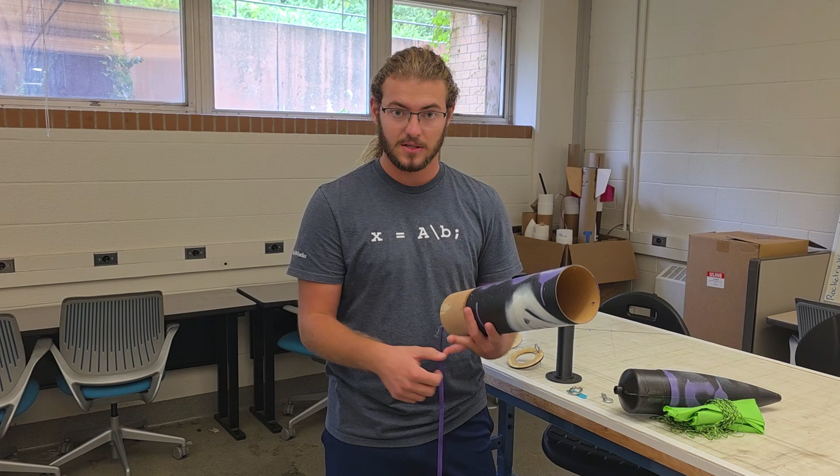So with a payload section that goes directly into here, a payload section will be where you can put anything, including electronics, plushies. I put an egg in there. Someone told me if an egg can survive flight, a human can. So food for thought. You can throw cameras in there to record your launch. That will be a payload section here. That leads directly to the coupler. Its job is to mate the two outside body tubes together, where itself will be connecting these two together.

On that, there is a bulkhead here, which is where the eye bolt is attached to, and that goes straight to the shock cord. For our tutorial, I'll show a quick link connecting an eye bolt to the shock cord. There's pros and cons to this. I like to do this where I can change out different components of my rocket. That leads directly to the eye bolt, which is this, which holds on to either a bulkhead like this, or a centering ring like this, where the quick link will just attach directly on, and then you'll screw it on to connect.

So after that, we have the shock cord, which itself is where the parachute gets attached onto, which I'll show later in this tutorial. But also, more importantly, it holds the rocket together on the descent from apogee in flight. So, carrying on to the booster side of the rocket here, we can see the fins on this rocket, with it being a 3-finned rocket, as well as the rail buttons here, which hold the rocket onto the launch pad before flight.

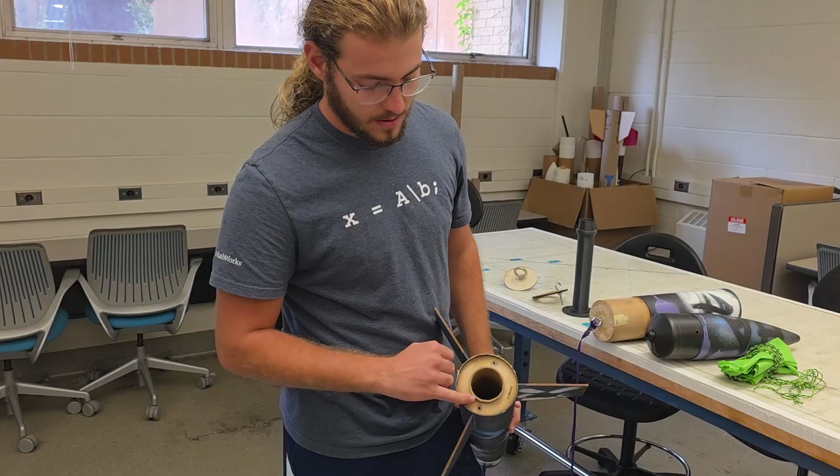Now, inside of here, we have our centering ring here, with the first one having this eye bolt to connect the shock cord to. The second one being here, where we have 2 insert screw sets where we attach motor retainer hardware, as well as, for our L1 certification, a motor adapter, which itself will be slid into the inner tube where the motor sits. This allows you to fly with a 38mm motor on this rocket. And then for your level 2, we use a J250, which uses a 54mm inner tube.

So now with this little rocketry introduction on what components are, we can start the design phase, where you will meet me in the annex, one of the computer labs in engineering. Okay, hello. This is the annex. Well, behind the wind tunnel of the annex. The annex was a little busy and a little loud, so I switched back here.

So first we're going to start off with opening up Google Chrome, and then going to OpenRocket, as well as then downloading it. So go down to downloads, click download. For Windows, I recommend this one, depending on the chips that you have to go with the sort of downloads. I already have it downloaded on this computer, so we can just open it up here.

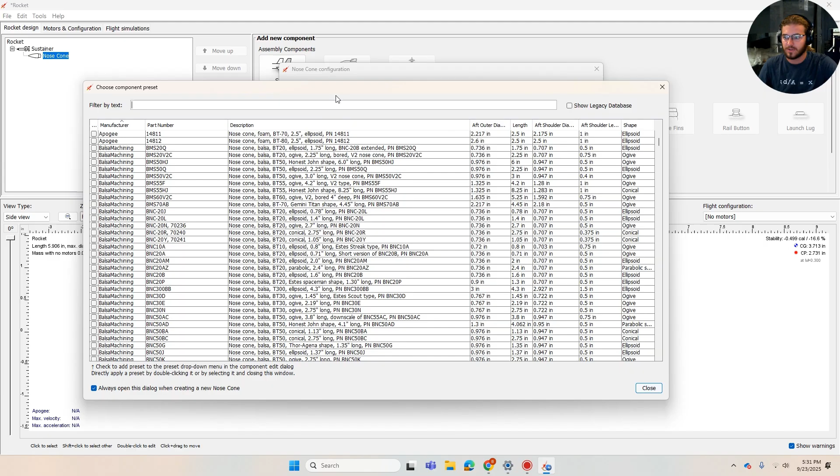So just like in the lab, we'll be starting from the top down. So we're going to be starting with a nose cone. This pop-up here is for if you have a kit. If you're making a rocket in HPR with materials that we have for building a rocket, it'll be scratch built, so we'll just close all of these tabs since it's not needed. But if you do buy a kit, each part will have a part number, and you can punch that in here, and it has all the dimensions. You don't have to make a new part for it.

So, on to actual manufacturing. The biggest limit on the nose cone is the length. Our printer can do 10 inches, or if you want to be a little difficult, I'll be showing that way. You'll be making the nose cone segmented, with a base and then the actual nose cone. That itself is a lot harder to do and more complicated. I'll be doing that to show how to do it for people who want to do it that way.

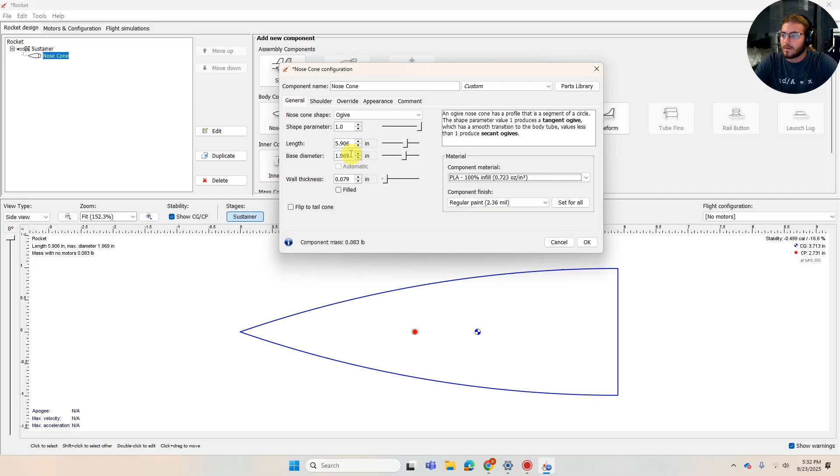So for materials, this will be 3D printed, so we're going to be finding PLA. It'll be under the plastic section on probably the updated version. The base diameter for a 4-inch body tube is 4.125. As for the length, I'm going to be doing a 3:1 ratio. That just means the base diameter times 3. So I have 1 diameter per 3 of length. So it's 4.12 times 3.

In Open Rocket, you can do basic calculations in there to get conversions, or what you can do is change the actual unit for that one part. It will reset back to the unit that you saved in the edit preferences. So if I change this to be millimeters, put in millimeter numbers, and come back to it later, it'll be in inches. So the thickness of this is 0.2.

Onto the shoulder. For the shoulder, you want roughly 1 diameter per 1 length of the component for a friction fit for a rocket. So with this being a 4-inch body, we want around a 4-inch shoulder. I'll be going with a 3-inch. That's on the low end, but I'll be going 3-inch. The thickness of this will be 0.2 inches, and the diameter will be 4 inches. So our inner dimension of our body is 4 inches.

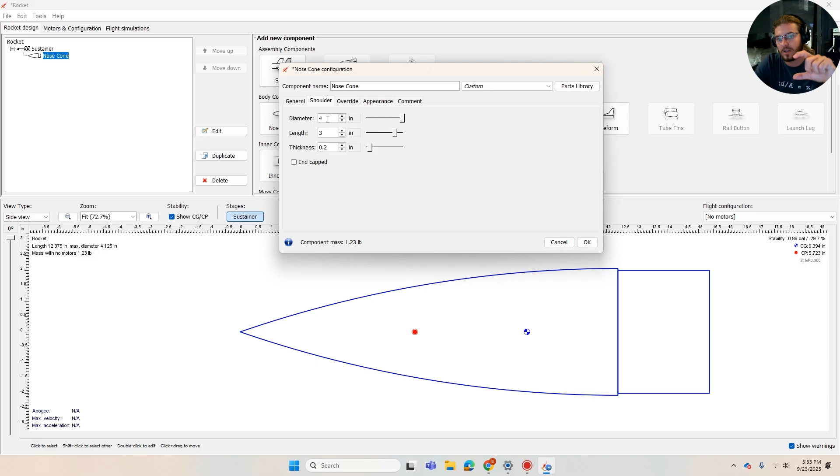So now with that, I'm going to be jumping over to make sure this is all good. Now the nose cone is complete. We can go on to the body tube. Again, close out that pop-up. Inner dimension is 4 inches. This will be a cardboard material. The total length of the body tube that you get is 37 inches. So you can use all of it or none of it. If you want to pay a little more, you can get another tube.

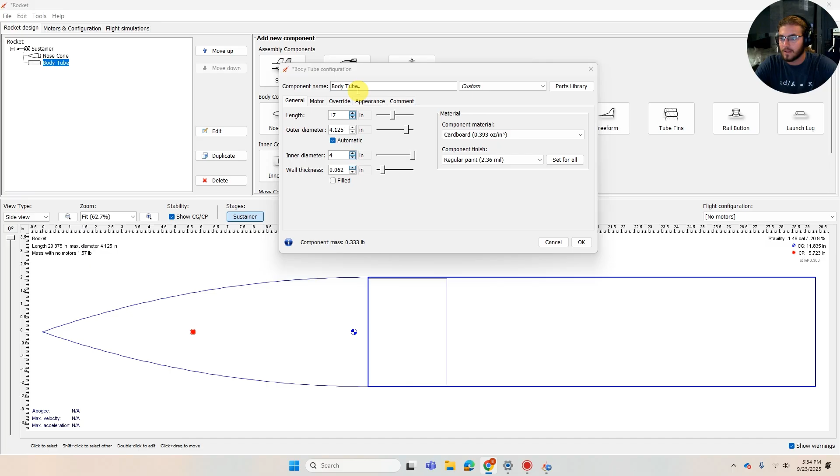But this section will be for the payload section. I'll say 17 inches, to allow for a 20-inch section down at the base for the motor. Now with that, I'm going to be relabeling the component name to payload section or payload tube.

And then with that being done, we can finish out of there, and we can add a tube coupler in the inner components section. Close out of this, the thickness of which is 0.2, just like all the other 3D printed components, of which it's PLA. And then for the length of this, we want it to be at least around 8 inches, with it being 2 lengths of a friction fit. So I'm going 6 inches, just because I'll be epoxying the upper end of that.

So that's going to be here. I'll make that 6 inches. And I'll be moving this forward to be plus 3.5 to allow for almost 4 inches on the friction side, and then 2.5 inches on the epoxy side. And then with that, we can close that out.

Onto the bulkhead of this. The thickness for the wood that we have currently is 1/4 inch birch. So I'll be making this birch. There we go. And then we'll be pushing this back 3 inches to allow 1/2 inch or 1 inch of length in our manufacturing process to allow us to not have it up against each other.

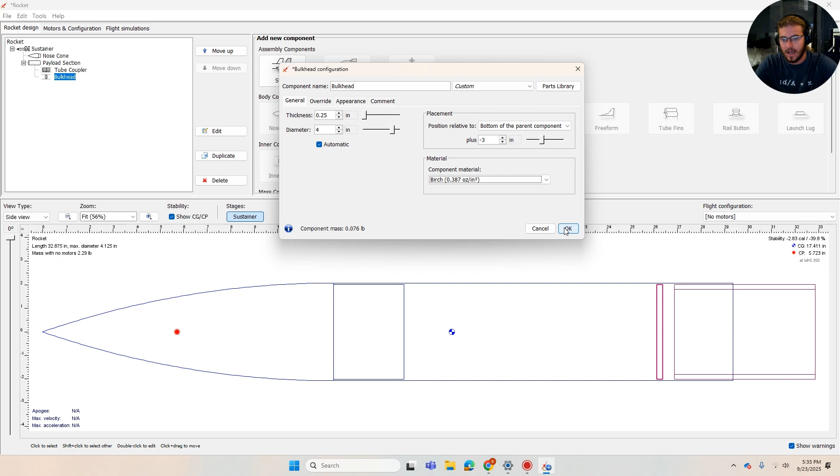And then we're going to add a mass component to account for the eye bolt as well as the quick link that I showed in there. Now this is an example of us changing over to grams, the weight of which for both of them is 40 grams total. It's going to be 1/2 inch length. I'm going to change that to the bottom component. So if I bring it to 0, it goes to the base of the parent component. And I'll back that up 2.5.

And then if you have a payload section, you'll account for the mass in here by adding a mass component and then making whatever dimensions it is, and then the weight. I'm currently not having one simmed in this rocket, but you are open to have that in there. But it's nice to have that section in there to future-proof the design, where you can have cameras, electronics, plushies. Like I said in the lab, I had an egg in my L1, and in my L2 I had 2 eggs. But it's up to you to decide.

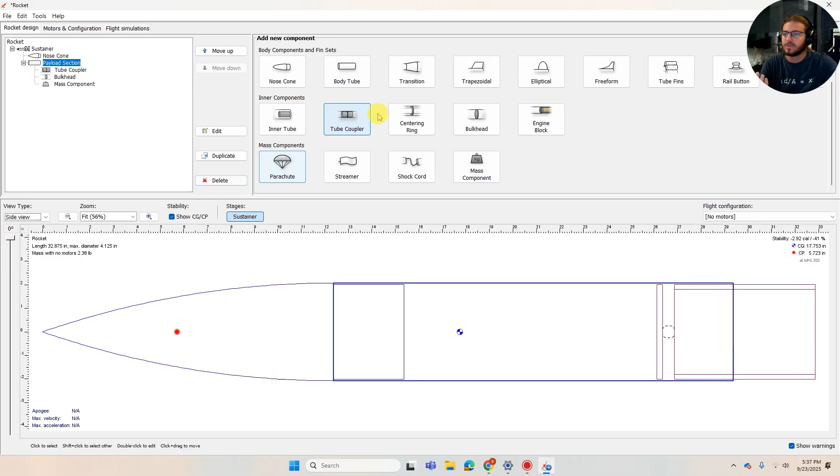Past this section of the body tube, we are complete, so we'll move to another body tube. This will be the motor body tube section, where the motor will be located. We used 17 inches on the payload section, so that leaves 20 inches left over for the motor section. And again, our inner dimension is 4 inches. It is cardboard, and there we go.

So now to work on the internal sections of this, we are going to have an inner tube here, of which the length is 10 inches, an outer dimension of 57 millimeters, and then an inner dimension of 54 millimeters. Now, the benefit of this design, it allows for all uses of 54 motors, as well as using an adapter, which will account for its mass for our level 1 design and level 1 launches. So this will be cardboard, we have the thickness, the length, all that done.

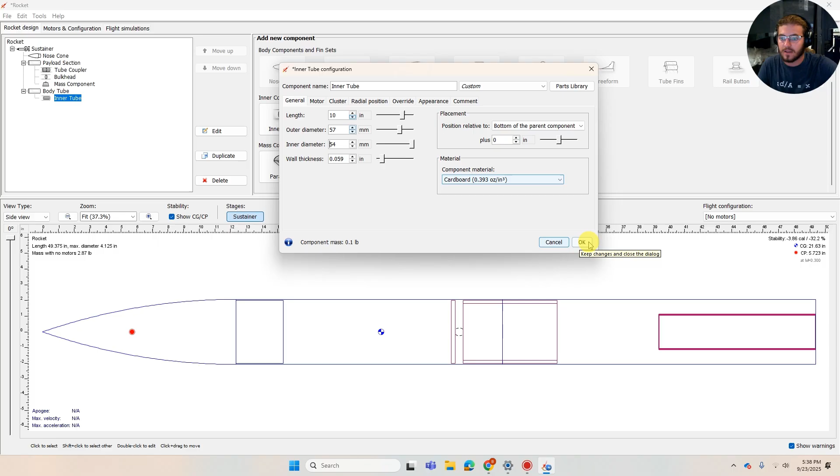So we're going to be adding a centering ring here. Close that there, with it being a wood component, thickness of 1/4 inch, and of which birch. And then we have our automatically calculated outer diameter and inner diameter. So we're going to be bringing this to -9, just to allow us to use that full length of the fin tab. And then a nice thing with OpenRocket, if you Control-C, Control-V on any highlighted part, it copies it.

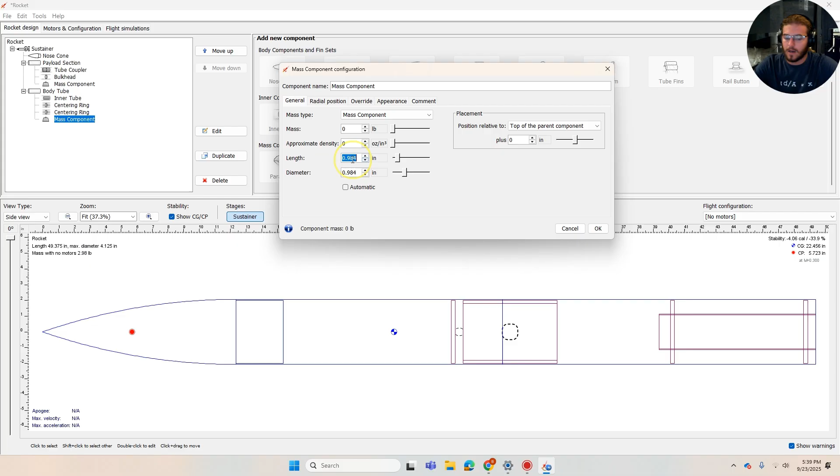And we'll be bringing this back 1/2 inch to account for the motor retainer and anything like that. So itself is there, and then a mass component for the retaining hardware, which is the eye bolt and the quick link. So we'll be moving this up to that first centering ring, as well as adding a mass component for the adapter.

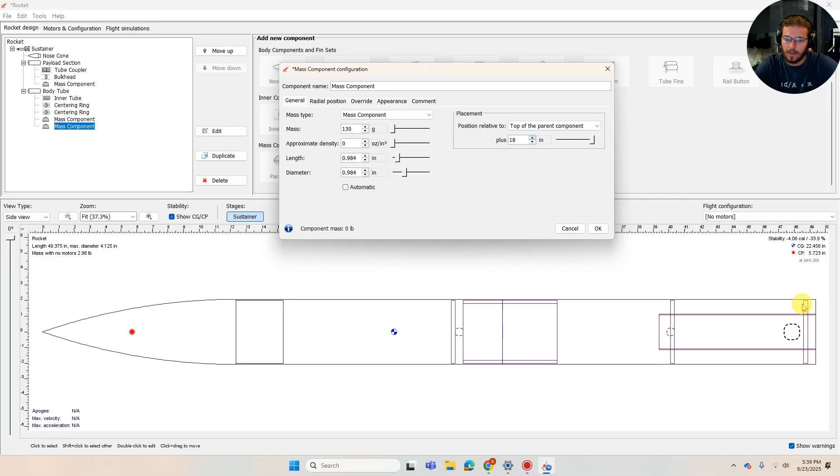So that is 130 grams, and you'll only need this for adapting from a 38mm motor to a 54 motor tube. So I'm going to move this up to right behind the aft centering ring, and we have 130 grams.

And then we'll be adding the parachute, of which the current parachute is a 3-foot diameter canopy, and the lines are 24 inches long. For the deployment of this, we want this to be at apogee.

If you have a flight computer or any electronics like that, you can have a specific altitude for deployment, or seconds after time. But with this being a dummy class rocket, not having any electronics in it, it will be at apogee. The packing size of this is about 3 inches by 2 inches, and then after that we'll go into the shock cord, which, like I said, holds everything together.

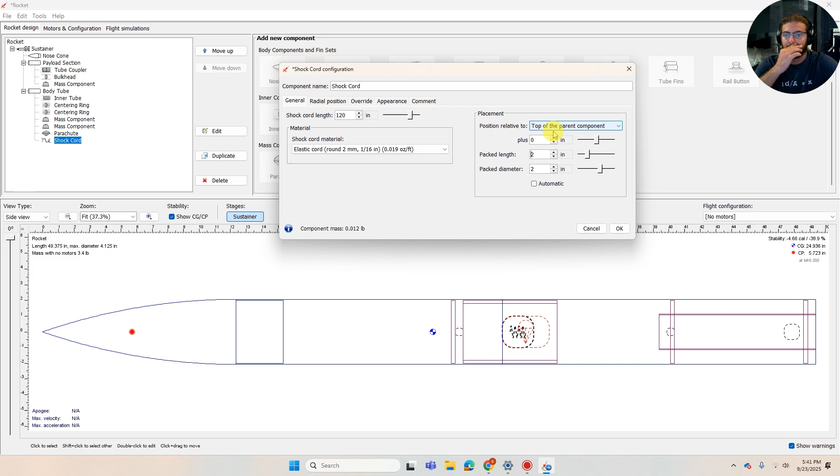The main thing we'll be looking at when we're designing our fins is the stability, with the fins and nose cone being the biggest things you can customize of your external rocket appearance other than the paint job. So this rocket is going to have 3 fins. It's up to you. I would recommend not more than 5. 3 to 4 is the common recommendation. I usually go with 3 fins.

But we're looking at the stability ratio here. We want that to be between 1 and 2. If it's over 2, it's overstable. That itself is not anything wrong, but it's something that we have to keep an eye on. As well, if we have under 1, that's something we really do not want. So we want that between 1 and 2. I like to have that in the 1.25-ish range. But before we go into the motors, we're going to jump to motor configurations,

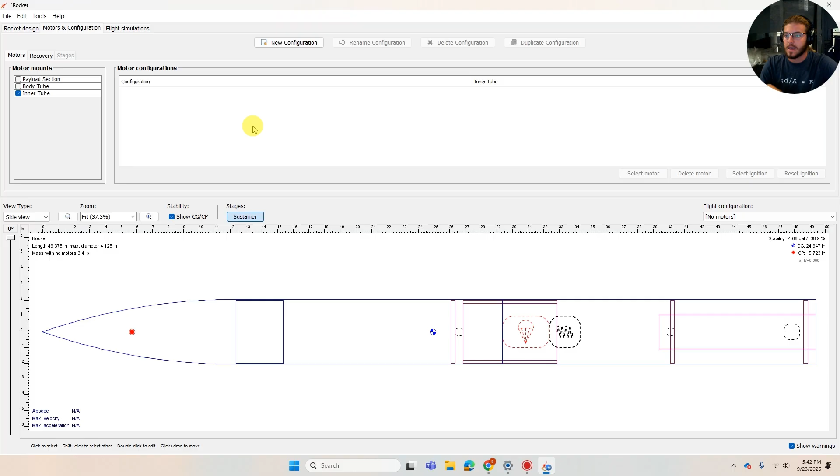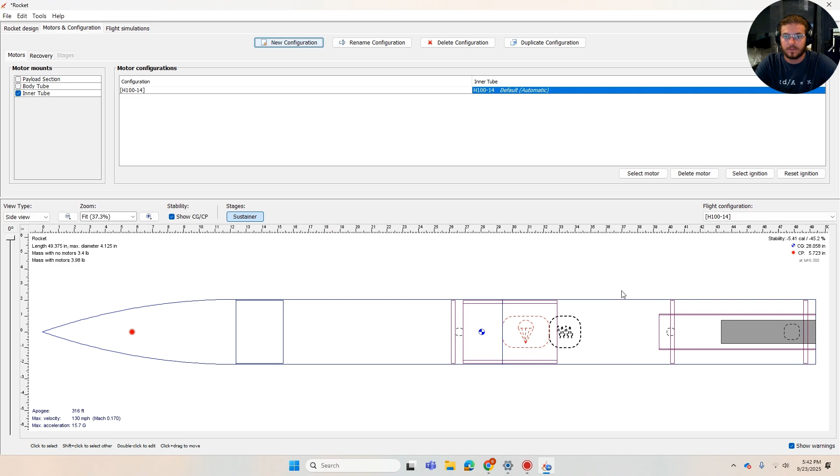where we're going to click the inner tube and add new configuration. So now we can select a motor out of the database to put in. When we fly a level 1 cert, we use H100s, which are sold by a few companies, but we go with Aerotech right here. And then that will be giving us some initial stability where we can start our stability with our fins.

So this is, again, without a payload in our payload section, so we're not accounting for that stability. It would be the same thing. You want to look at your stability ratio. You want that between 1 and 2. So now with that complete, we can go to our freeform fins. This just gives you more customizability with that.

The main restriction on this is we don't want pointy edges, which I can demonstrate in a second, as well as we don't want a size of fin bigger than 15 by 15 inches due to our laser cutters' size. So I'm gonna have very small fillets. I'm talking 1/4 inch fillets. I'm just gonna do that with my finger, so I have my glove and then run it along the root chord.

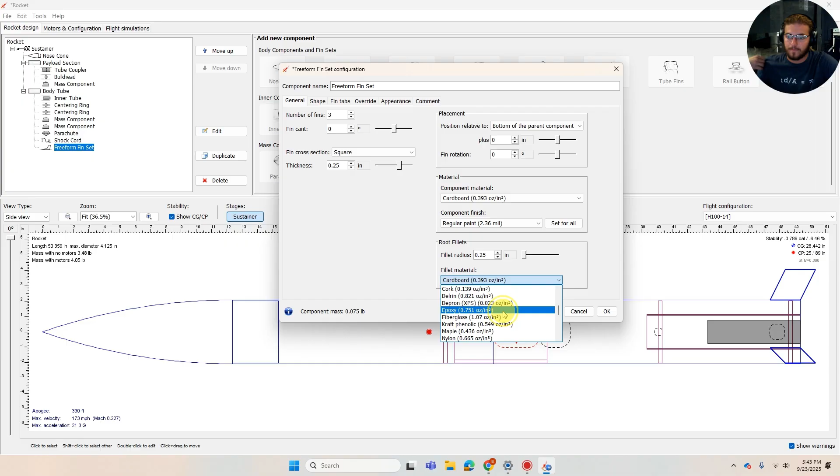I do believe epoxy is here. If you don't have it there, you would have to make a custom one, and the current weight of this is 0.751 ounces per cubic inch. And then with that, we can start making our fin shape. So I'm going to make this probably a 9.5 inch length fin.

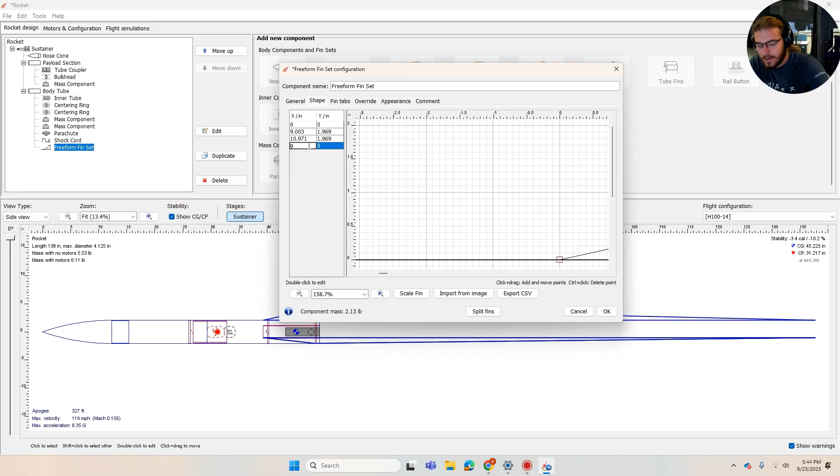So I'm going to bring this back to here, and then in general bring it back to be 0. Oh, I did that. I'm going to make this 9.5 inch. Whoa, that is not on. So we're going to go to 9.5. Delete, 9.5. There we go. Going down to general, I'm going to make that flush at the base. So back to the fin shape, bring this back over here, and then zoom out.

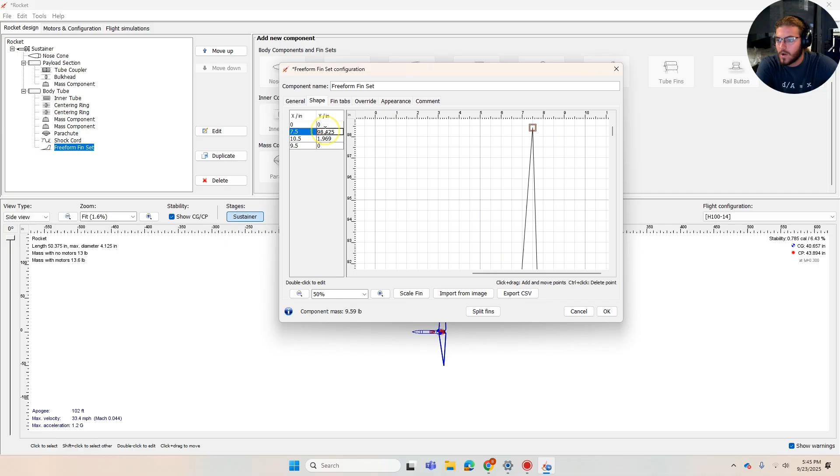I'm going to have this located at 7.5 inches, 7.5, and this to be at 10.5. And then I'm going to bring this out to be 2.5, 2.5, and then 2.5. Now, the main thing I'm looking at when I'm putting these numbers in is the stability margin right here. We want our CP to be behind our CG, which is shown right here, and also visually on the rocket right here.

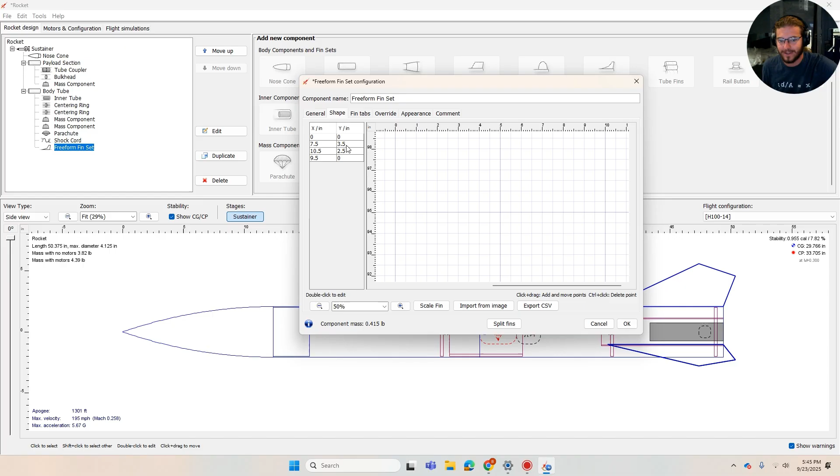So, you can drag these around, up to you, but I like to go this way of having 7.5, and just visually doing it like that. So I'm going to jump these to 3.5. Not actually typing in fully sometimes, so 3.5.

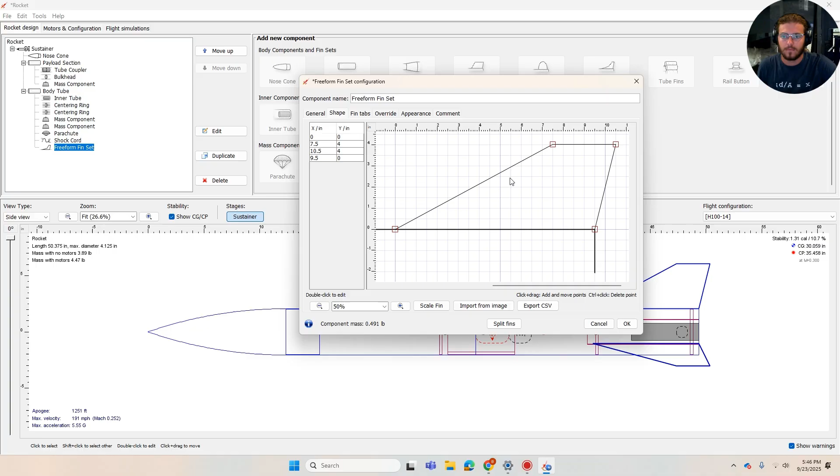So again, a little less, so I'm going to bump it up to 4. There we go. I like to have my stability ratio for subsonic flight around that 1.25 mark, but that is up to you between that 1 and 2 ratio. I would always recommend 1.25. Right now I'm sitting at 1.31, which is completely fine, and with a little bit of a basic fin shape, which I'm fine with.

And then for the fin tabs, which actually connect the rocket fins to the substructure, we can do automatically calculate. When you do this, you want to make sure that you have the dimensions of the fin between the two centering rings. Now we did see that the stability decreased, so I'm going to go back to that fin shape, and I'm just going to make this 11, and I'll make this 7. A little more blunt, there we go. I might jump this to 4.25.

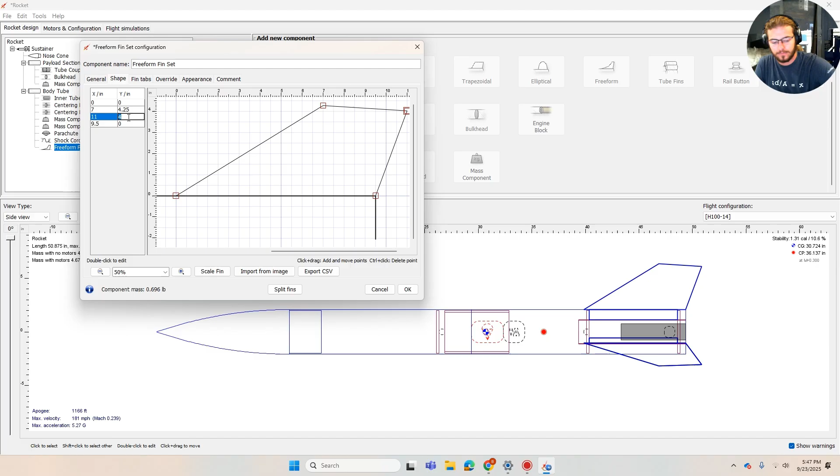Okay, so now with that done, we have a fin design and an overall rocket design. Now, when you have a payload in your payload section, your fins won't need to be as big because that pulls the CG of the rocket forward. So, with me not having a payload in my payload section, that does bring the CG back, which itself needs to have a CP further back. So with this, it's also kind of future-proofing this rocket design to an L2-type design. So we're just going to go back to fin tabs, make sure that's all good, which it is.

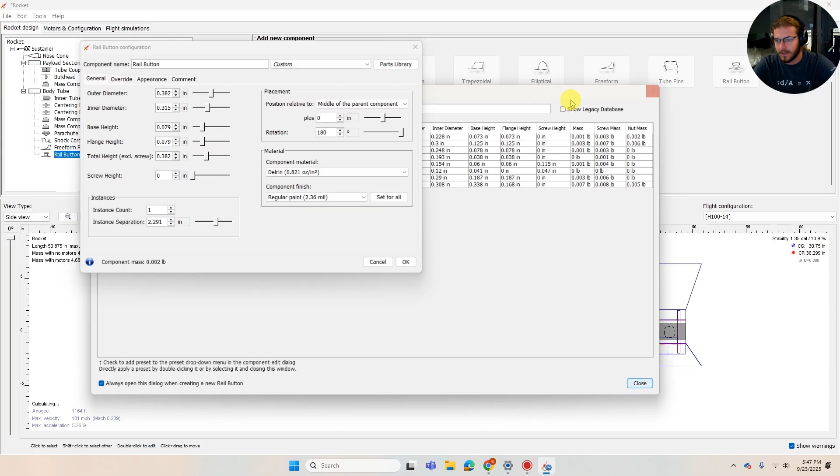And then now with that, I'll show you the motor for an L2 rocket. Oh, one thing I did forget is the rail buttons here. We want these to be behind the centering rings here because we screw them into the structure, and it allows for the screws not to be caught on the payload of the parachute or shock cord. So I like that there. I'm gonna copy it, paste it, and then just bring that down there. And like I said in the lab, this holds the rocket onto the launch stand.

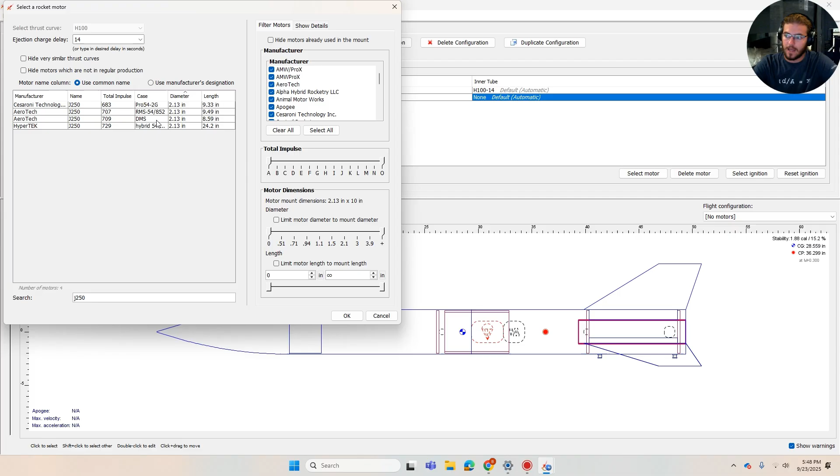So with that, if you're looking at reusing this also for L2, for a new configuration, we'll look at a J250, which is what we used in the club for a DMS version. So that is not reusable. That's what we use in the club for level 2 certifications. So you can see that we did become unstable with that, just because that is a heavier type of motor and that pulls the CG back.

So what we can do to fix that is adding a mass component into the payload section, actually having a payload. And let's say, I think my payload was about 350 grams. So throw that in there. Oh, look at that. We are back to being stable. So we're hitting that 1.25-ish with that. So this rocket design can be used for L1 and L2, but make sure that your payload weight can account for that heavier weight of the booster.

But we also look at it, we won't be needing the hardware to adapt. So we take that off, and we're back to being stable. So I'm going to Control Z that, delete this mass component because I am making this for a level 1 class rocket. So this is what we'll be using for our design. And with that said, we can start on the modeling section of the video.

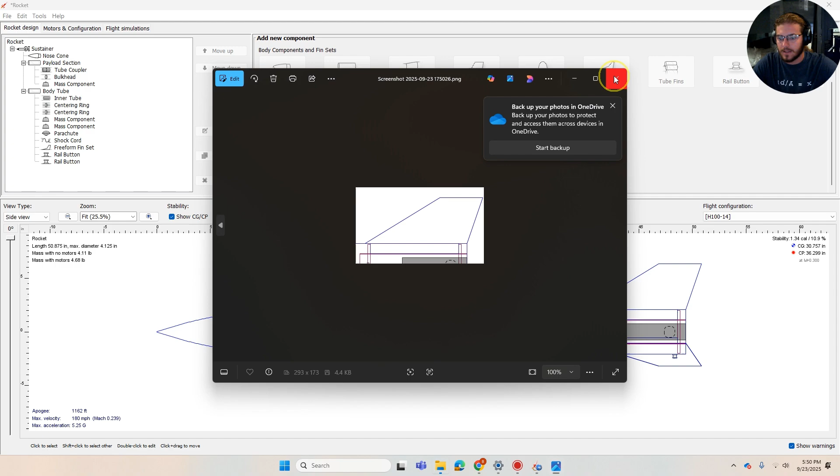So on the computers in the G400 and the computers in the lab, we will be using NX as our main software. So we'll just type in NX, it pops up right here. And we'll start off with the fins. So I'm going to take a screenshot. There we go. I'm going to see if that's saved. It did. So I'm just opening that to make sure I got everything on there, which I did. Lovely. So I'm going to open NX.

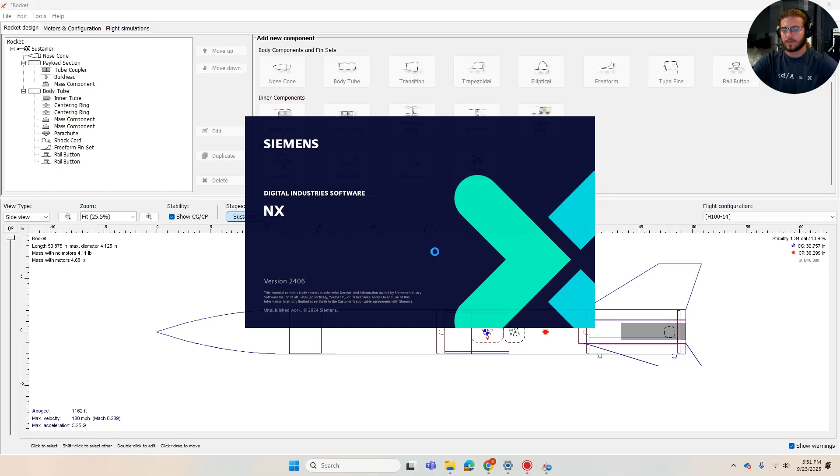There we go. So with the screenshot that we just took, we're going to use a thing called raster image, which is where we can input a file into a sketch, and then we sketch on that image to allow for it to be sketched onto our actual sketches for us to be using. So with that, there we go. I'm going to just click that up there. Okay, so with that, we're going to start a new file. Oh, that's open. Start a new file.

I'm going to be using inches for this, and then this being fin, I'll label it as L1 fins. So now with the name of that, we want to make sure that's on model and then inches, just because I've been using inches. And then now that it has popped up and everything is going good, it's still loading. Okay, so now we're ready to go.

We're going to search on the top. I'm going to bring this down here for right now. We're going to type in raster image. That pops up right there. We want to open up the file, which is right here. Pictures, screenshots, JPEG. Oh, I did not save the file as JPEG. That's okay. I'm going to switch down to PNG. There we go.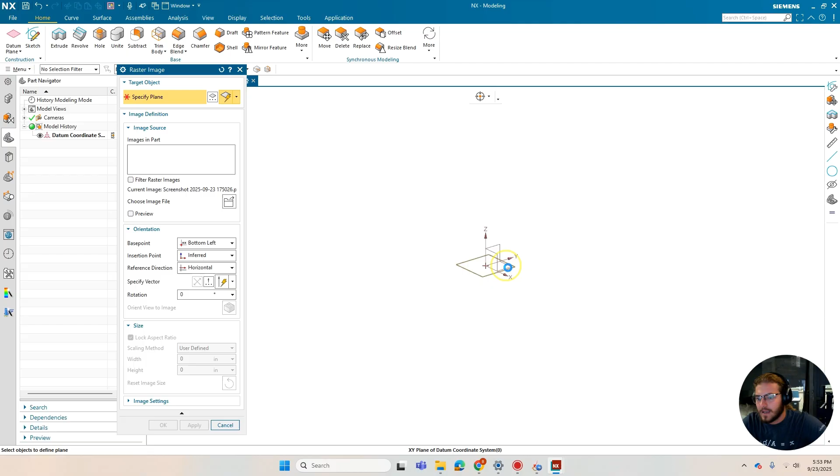Okay, so we're going to open up that file. I'm going to select the plane down there, zoom in, and I'm fine with how that laid out. So I'm going to click OK. Click Sketch. We want to make sure we click the top-down version for when we're exporting this. So we click down on top view, and then now that we have the sketch here, we can just sketch along this, and we have our dimensions.

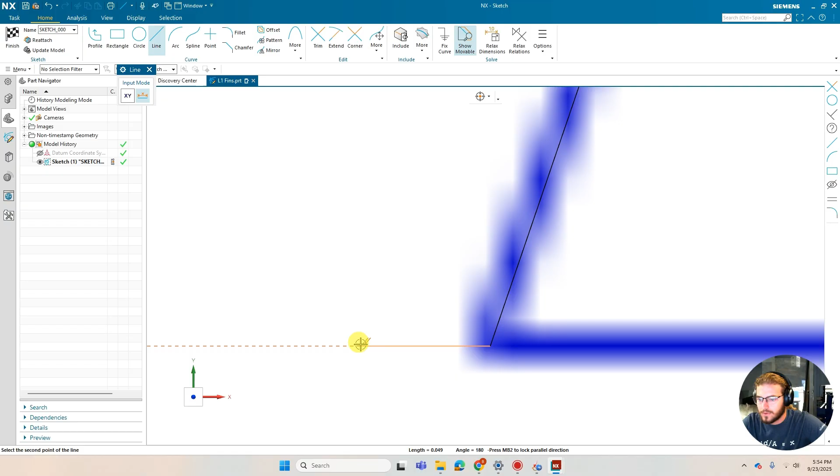So I'm going to take the line here, line up, I'm going to zoom in, take there, come over, line up there, take from there, down to here, and we'll be just tracing the outline of our rocket. So then there to there, there to down here. If you do want to be exact, you can be. You can get all the dimensions off of OpenRocket, but this will be just as good. It'll be slightly off just because of it being eyeballed.

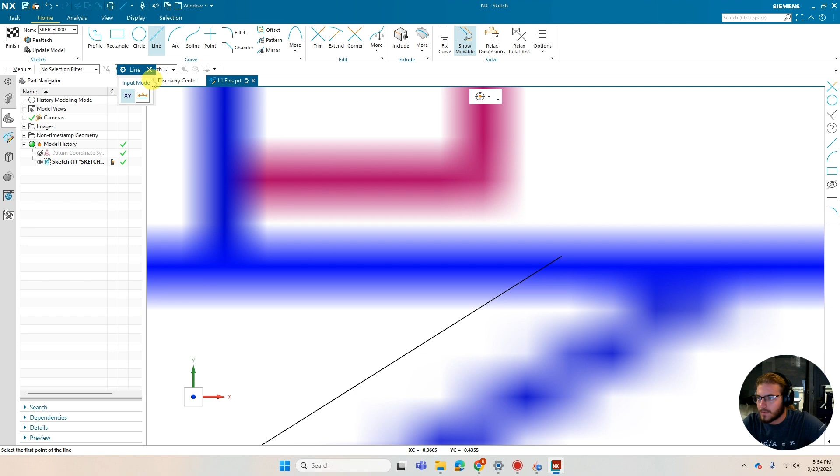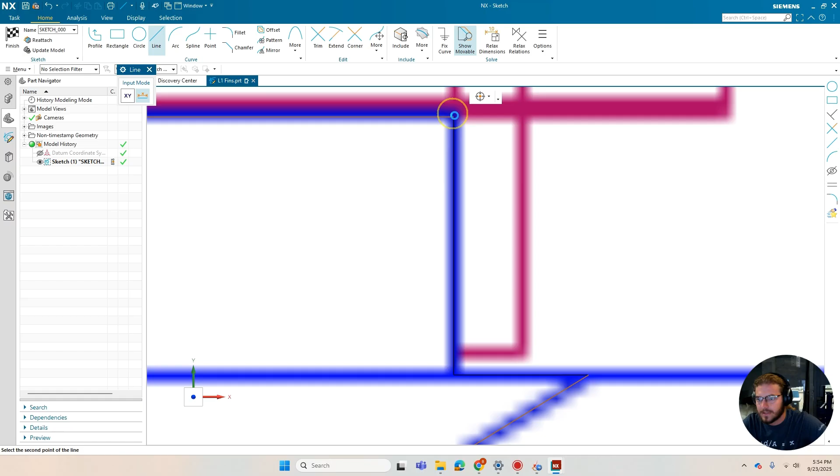Now, we do have the ability, oh, come on. Oh, I'm going to cancel that. Bring that to right about there. And then continue sketching along the outside. About. I'm going to use this to sketch the below. And a line there. And then now it will line directly up to that section. And there we go. So now we have traced the outline of this fin.

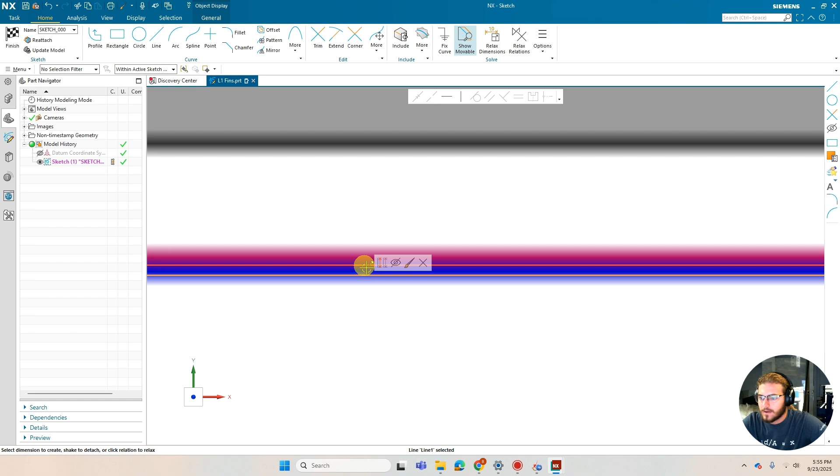We're going to pop back into OpenRocket, go into the fin section, go to fin tabs. We look at our length right here. So I'm going to copy that length, jump back to NX, click on that dimension, double click, unhighlight, click there. There to get dimensions. Oh, double click. Click there. Paste in our dimension. And then we want to click yes to scale the entire sketch. And then now that brings the entire shape of the fin there.

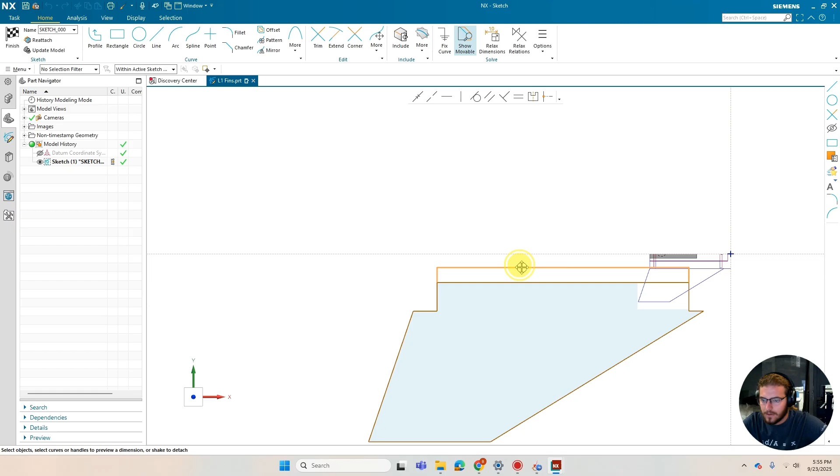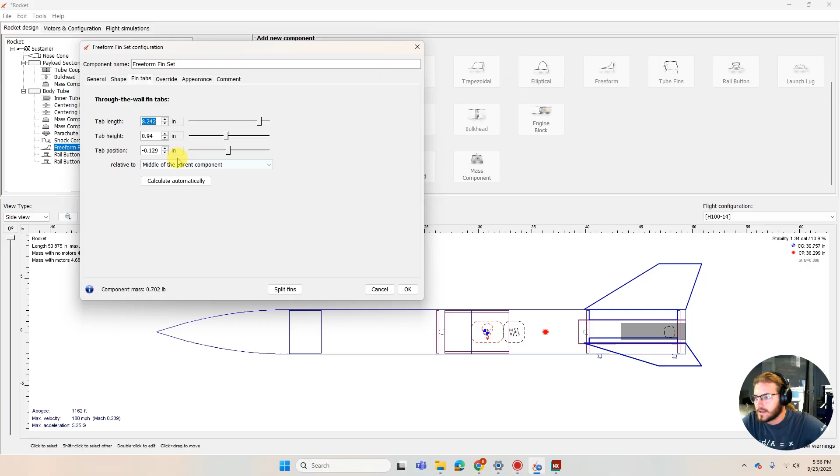And when we click enter on that, that will give this dimension an actual dimension. So you can change the size of these up here. I'm going to go back to home. We can look at this section here. This is supposed to be 4 inches based off the OpenRocket, and then go back to the OpenRocket. I don't have that memorized of the fin tab height. So I'm going to copy that, jump back over to NX, paste that in there, paste it back in here.

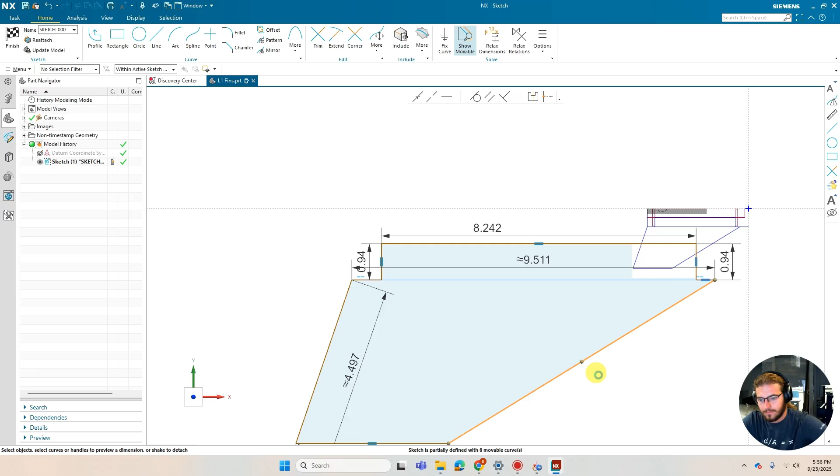Go. And then final thing we check with it being 4.5, we click here to here. That is pretty close to 4.5. I'm going to not do that actually because that is close enough to what we wanted for dimensions. All I have to do is click around and give these all actual dimensions to make it a final sketch. Once we have that, we're going to click this point here as well as this point at the base, and then click make coincident, which will just lock it together.

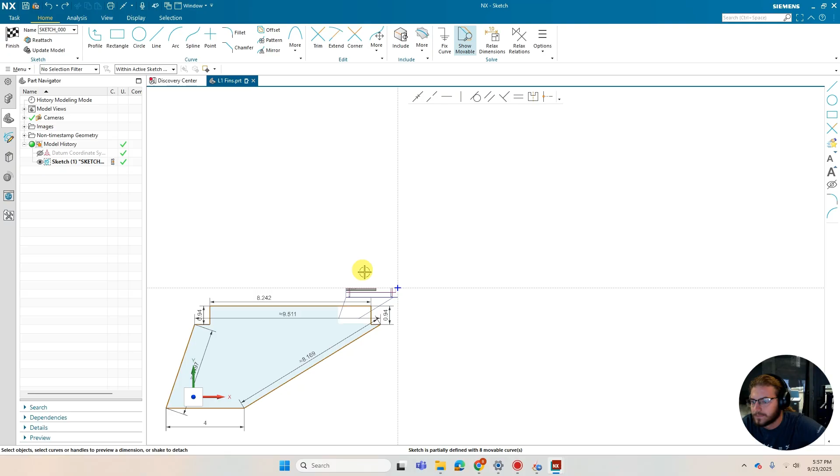And with that, there will be, oh, what did I do? Oh yes, we want to have our length here given. Forgot those. And this will scale everything together so it brings everything over at once. So click there, back to that point, have it touch, align, there we go. Now we have a fully defined sketch. We'll be finishing this, and then we can hide the screenshot. So now we're going to export this file down here at export, down to DXF.

And then we're going to make sure it's DXF, and for location, we're going to be going to downloads, and then that'll be fine. So we'll go to next, to export view. We don't want work view, we want to select a view, which is top down. So we made it from the top of the actual software, and we'll be making it from the top there. So I'm just going to pull this back up to here.

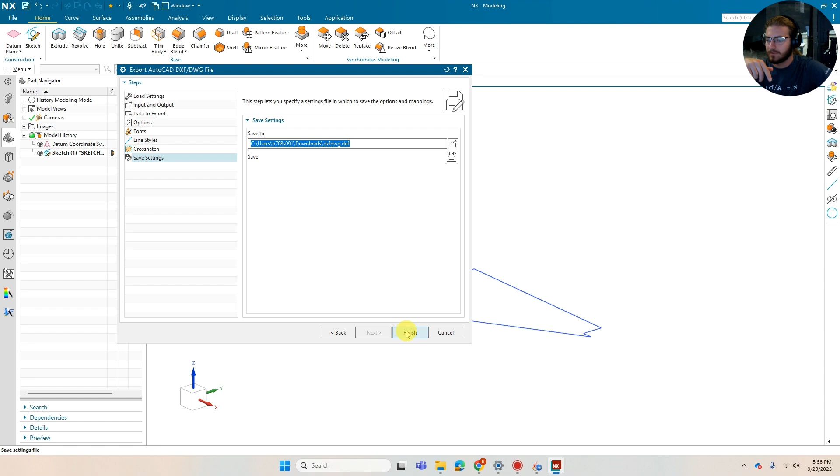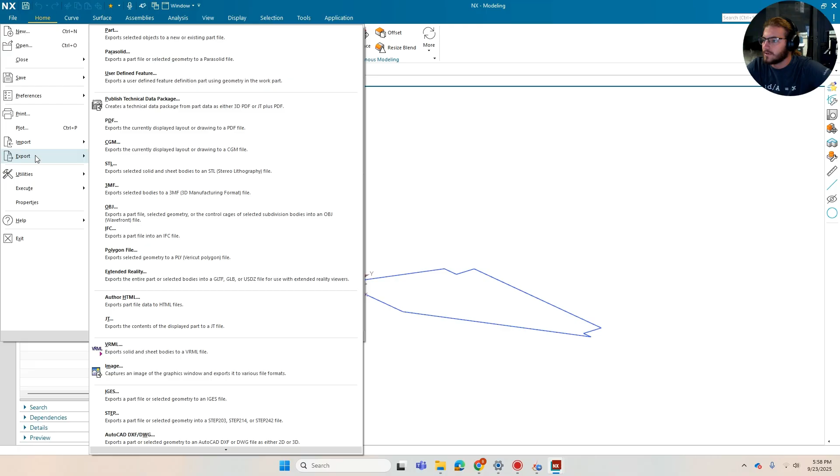We can actually look at it. Yes, so then we have next, next, next, and we have that in the download. So we finished that. Yes, we want to save. And then now if we go to our fin tabs, back to here, we want to not actually save, but export DXF.

Next, we want top down. Okay, never mind. It did work. It just took a second. So if we look back over here, we can see that we have our fin tabs, right? Our fin shapes right there. So now with that said, we can move on to a new file to make the nose cone.

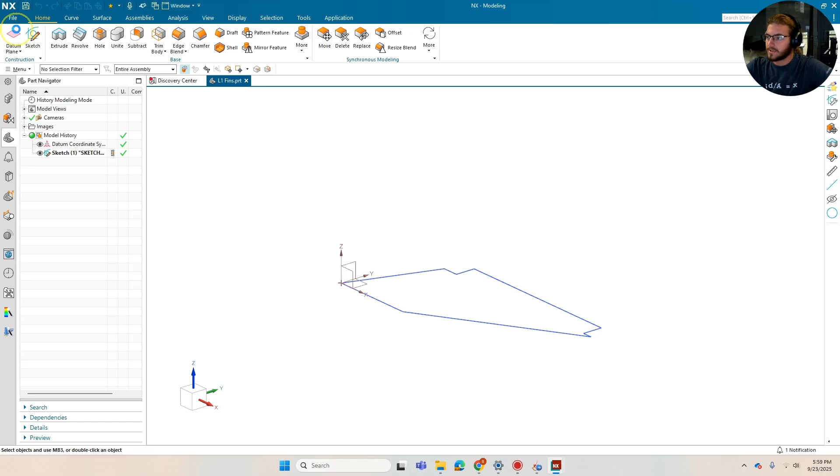So the nose cone itself will be more complicated just because we chose to be longer than 10 inches. I recommend staying at the 10 inches. It's significantly easier on the manufacturing process as well as the design aspect of that. Again, we'll make this L1 nose cone. We're going to go back to OpenRocket, take a screenshot of the nose cone, and then the exact same thing. We're going to pop back down to

Hello, this is post Ben. I realized I did something wrong with the nose cone, so I'm going to be redoing that. But some updates from the future Ben: we're not having an actual certification video. So next video will be manufacturing, and in the beginning of manufacturing I'll be talking about the certification process a little bit instead of having a whole dedicated video towards that.

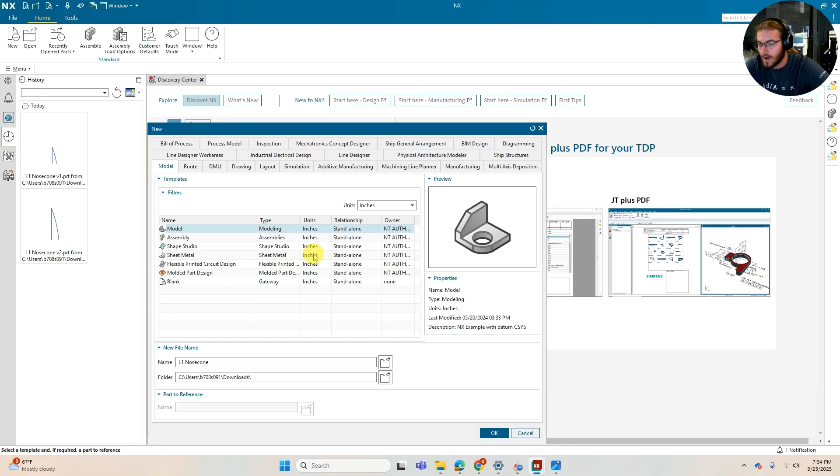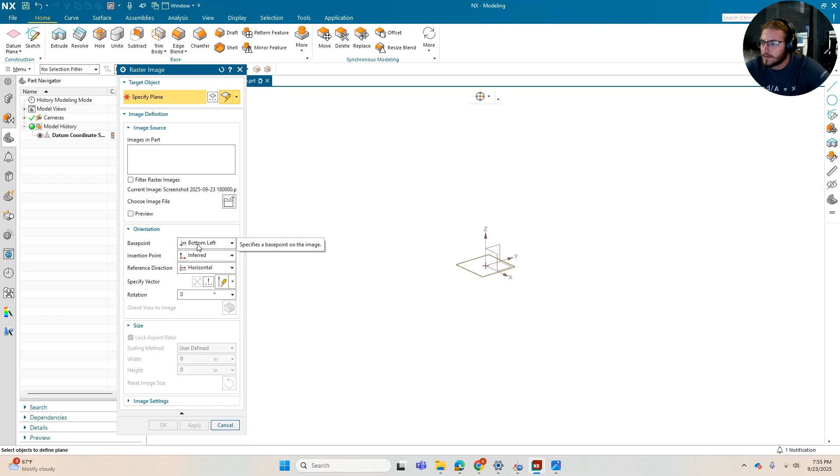But other than that, we're going to go back to NX here, make up a new file, and then start working on our nose cone. So just like with the fins, L1 nose cone, make sure it's in inches and model. And once that is up and running, jump into raster image. I'm going to find the file. There she is. And then specify the plane. I am choosing the ZY plane since that's the more accurate plane to put in, but it does not really matter.

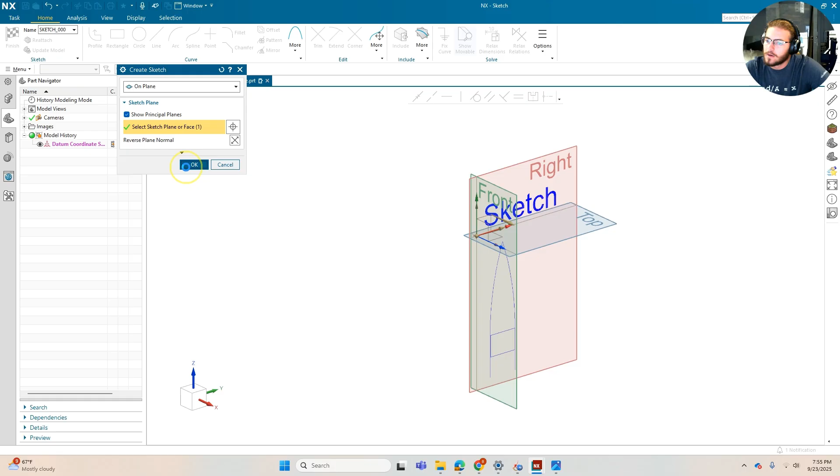And now that the raster image is there, we can go to sketch on the ZY plane, and then we can start sketching on there. So the mistake that I made on the other video, which you guys aren't going to see, was a very simple mistake, and instead of just typing it out, I'm going to be doing this redo of the video, and I'll talk about how I messed up when we get to that step. Make sure we outline all the outlines of the nose cone, and then when we get to here,

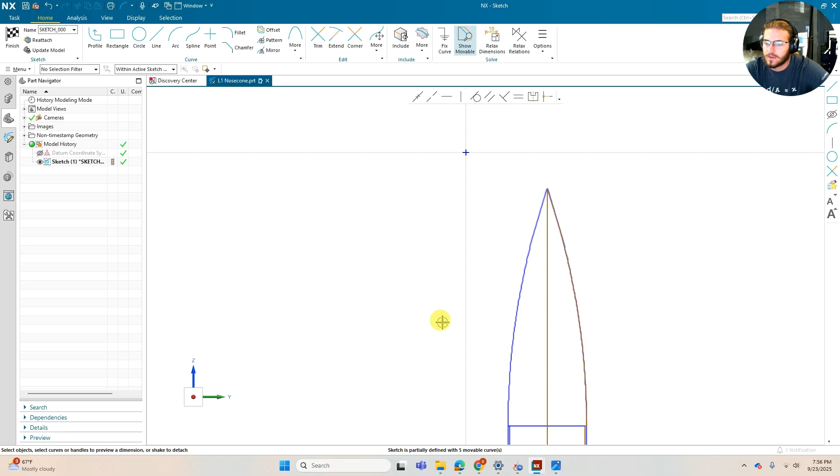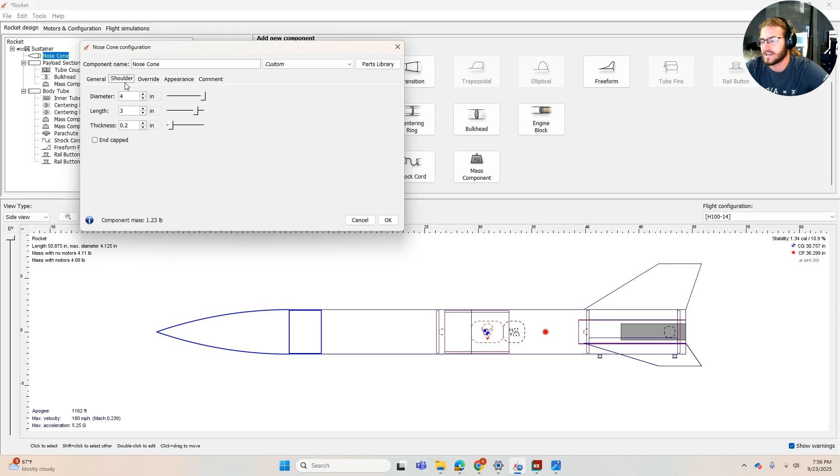when we get to the curve of the nose cone, we're going to go to arc, click there, all the way up to here, make sure we're highlighting the whole part, and then line up with that nose cone. So what this is telling the computer is, okay, now keep that there. Now we're going to switch back to OpenRocket and get the total length. This is the length of the upper section here. So I'm going to copy that. Shoulder length is 3 inches, so it's going to be 15.375. Yep. Jump back to NX.

Now with all of these parts connected to each other, just like what we did with the fins, we're going to scale the whole sketch. So now with that, all these dimensions should be accurate. What I did on the previous attempt was I made this length 12 inches, which I believe on the updated version, with this computer not being updated,

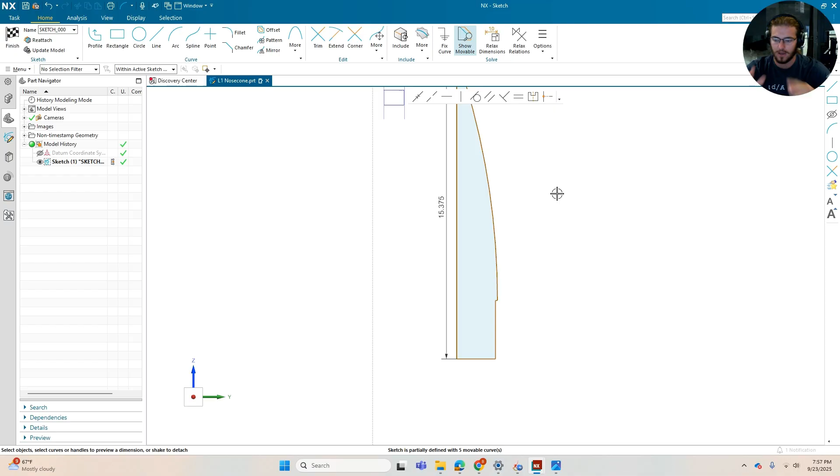the only change is the updated version takes into account the length of the shoulder. So if you're using the updated version, keep that in mind. If you're using the old version, just keep in mind the total length of the nose cone. So with that, we should get accurate measurements for these, about 2 inches. That is correct. This is going to be 3 inches. And then this is going to be 1/16 of an inch.

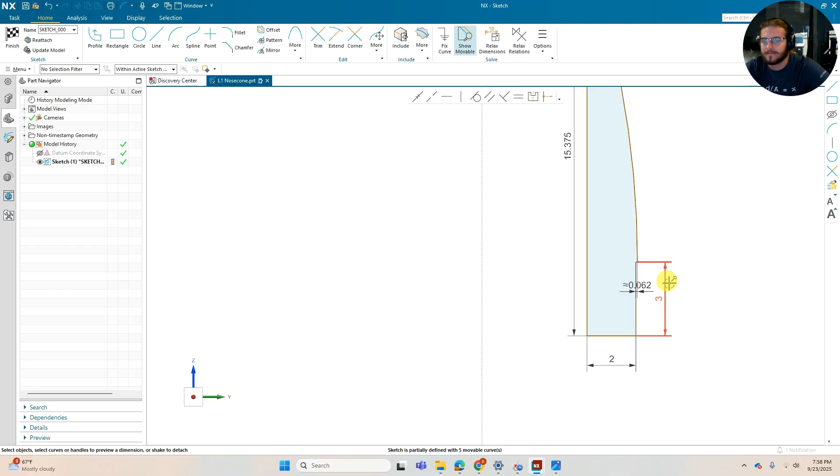So 1 divided by 16, and our formula. And then we're going to make this into that radius. Now we're going to click this point down at the base. We'll click that one first, and then click the point up here, because that will tell the computer to move this first. Oh, I just did that point to that point, and I'm going to move that together.

And now the sketch is fully defined, and now it's going to get to the little bit of a complicated part where I'm going to copy this, save out of the sketch, and then I'm just going to hide this. It's not really needed. And then go down to save as. I'm saving as the exact same thing under my downloads.

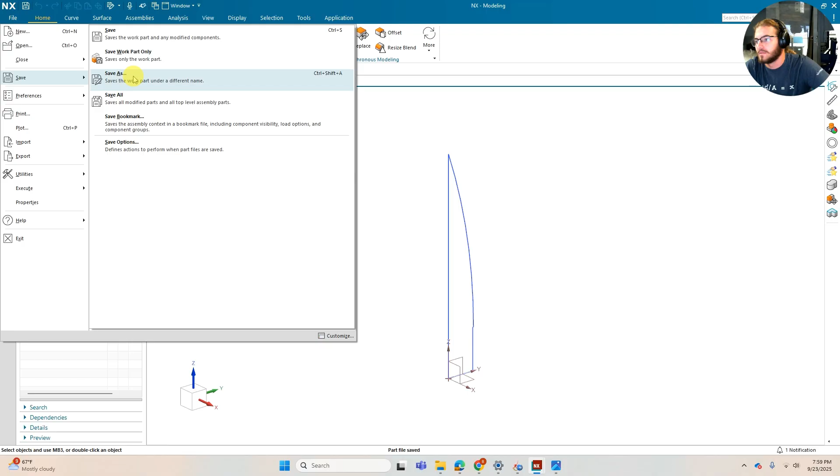Nose cone V1, and then save the exact same file but as V2 or however we want to name it. So now this is V2. So with the whole length of it being just shy of 16 inches, we have to make sure the two parts of the nose cone do not exceed the length of 10 inches. So how we're going to go about doing this is open up the sketch once again. This is V2, so we'll be focusing on the upper section of the rocket.

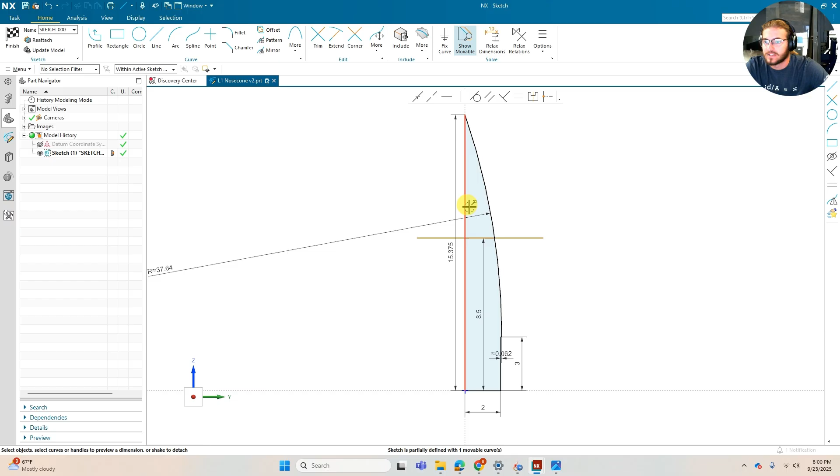We're just going to get a line straight across as our dividing line. This measurement is 8 inches, so I'm going to make that 8 inches. So that's the kind of halfway mark. I changed my mind, 8.5. Well, this, like I said, will be taking up the upper level, so that leaves about 7 inches up here and a 1 inch shoulder for the actual component.

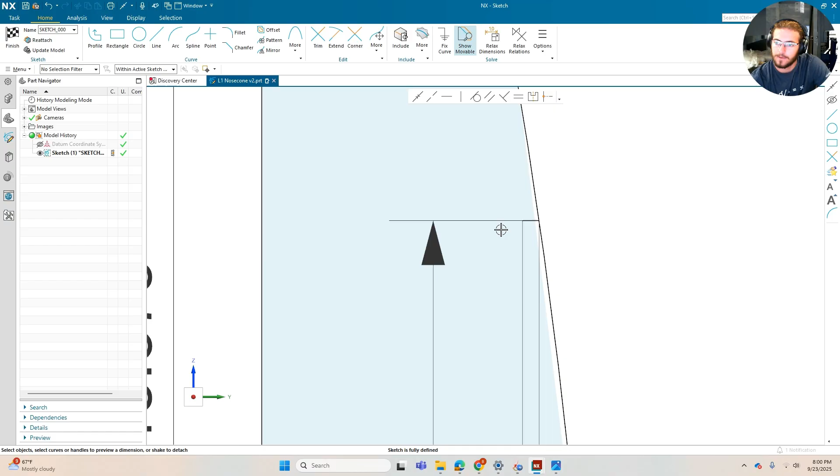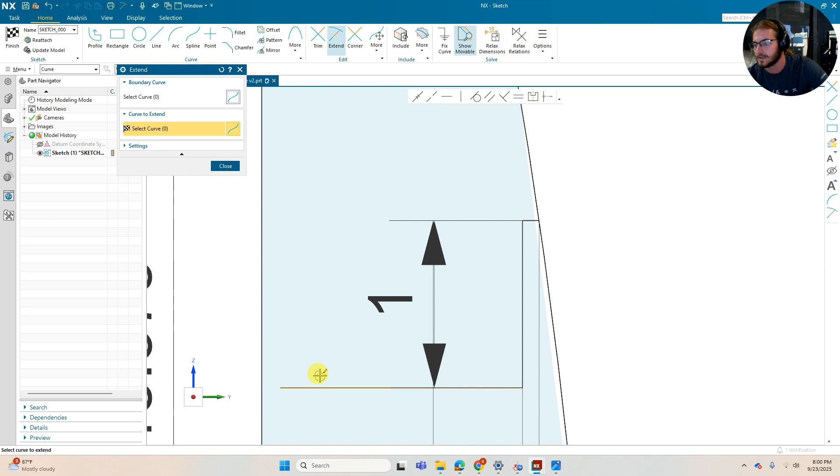So we're going to get here to touch there, and then this length is going to be 0.1 inch. And then we're going to drop this down by 1 inch and then over to connect. So I'm going to leave this as not fully connecting just for this second. I'm going to bring that to 1 inch. And then what I'm going to do is click this extend feature up here to jump across, close, and then that will give this a final dimension of whatever that is.

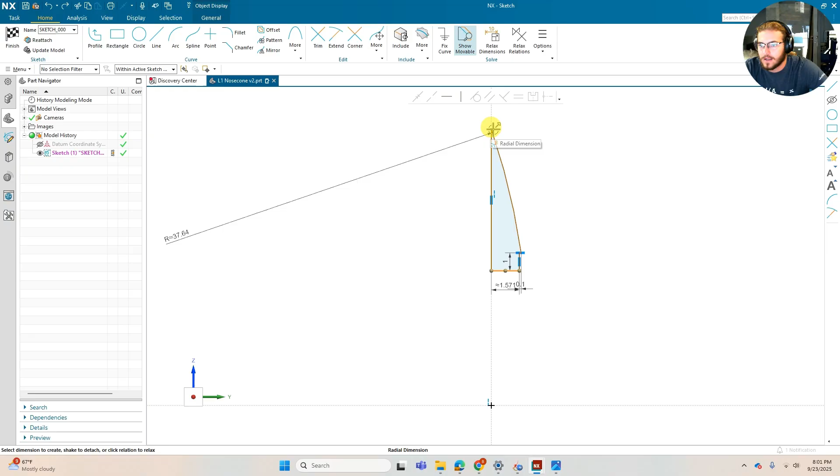And then now that will go into actually deleting this bottom part which we don't need. So we use the trim function, just draw along here, erase all of that, and we're going to bring this corner all the way down to the center. Whoa, Control Z. We need to touch that up to there. And now with that, we can jump and bring this down here. And then bring that down.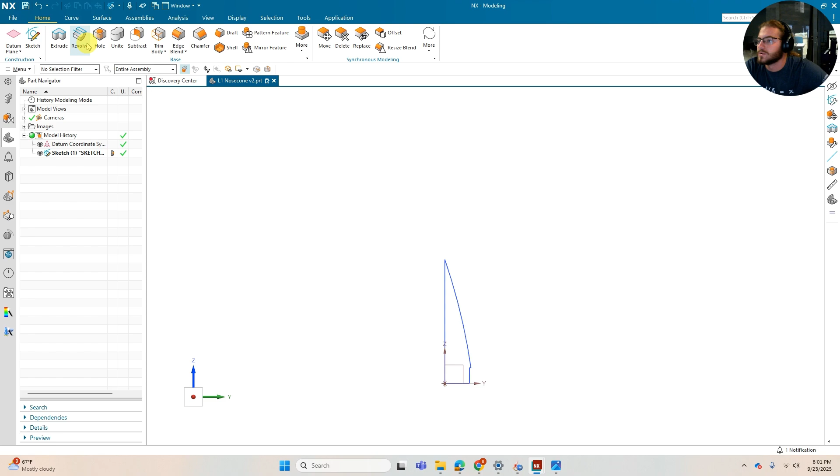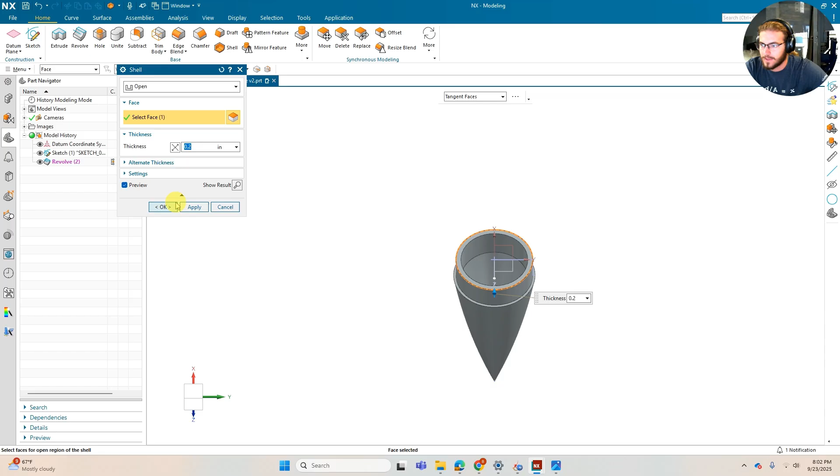And now we have a fully constrained model for the upper level of the nose cone, which we're just going to finish. We're going to revolve. We want to make sure that we click the component, then the vector, so we want this up and down vector on the Z, and then specify the point that we're rotating around, so just click there, and there we go. So apply that, and then shell. We're going to shell by 0.2 of an inch right there, and then we're going to hide this sketch just so that it's easier to look at.

But then we see the point of the nose cone coming together, and this we made 0.1 inches, then the other one would be 0.095 to account for tolerancing. And we're going to export this as an STL file. So just like with the actual NX files, we're going to specify where we want them, and then we're going to highlight the object, click apply, and then looking into the download section, it has popped up in the download section.

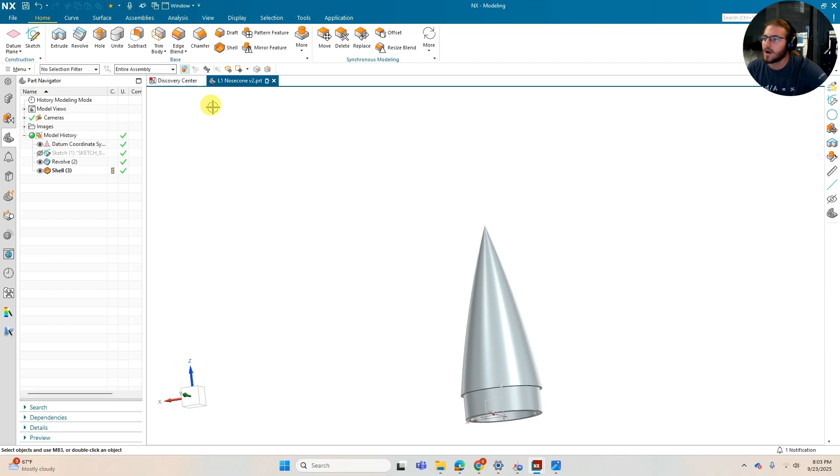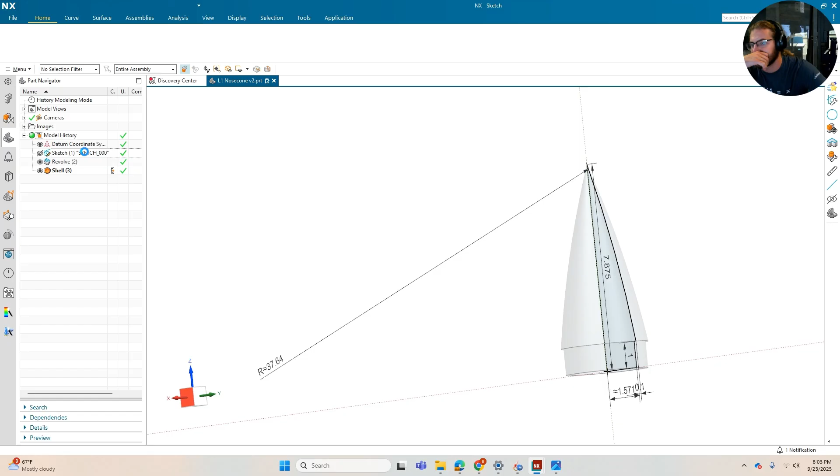So now we can open up the V1, which is the exact same thing where we left off, jump back into here, and we made the line at 8.5, I'm confident in saying. 8.5, and then just to confirm that, here to the point, it was 7 plus, bingo. So that is correct. And then we can just double check that real quick by going into here, jump into sketch, and then yes, so it was 8.5.

Okay, so exact same thing, bring that over to here, have that to touch, shorten this to 0.95, whoa, sorry, 0.095, have that come down by an inch, and then over, and then we'll do the extend feature just like how we did before, this being 1 inch, extend, bingo, and then we want to label everything to make sure it is all accurate.

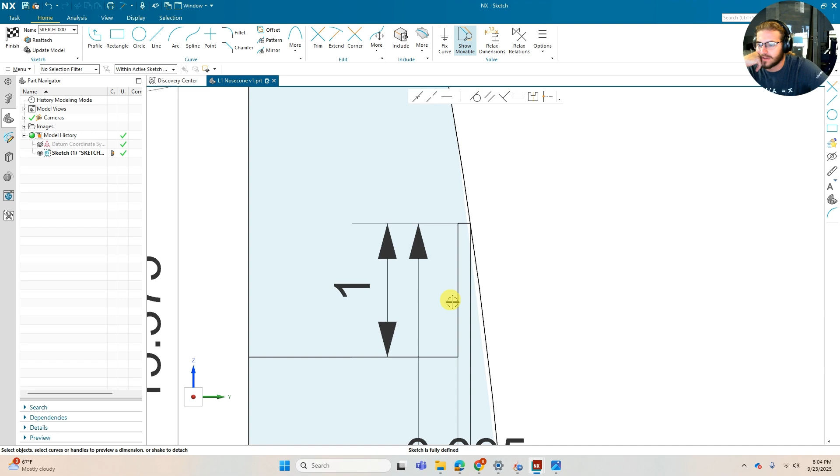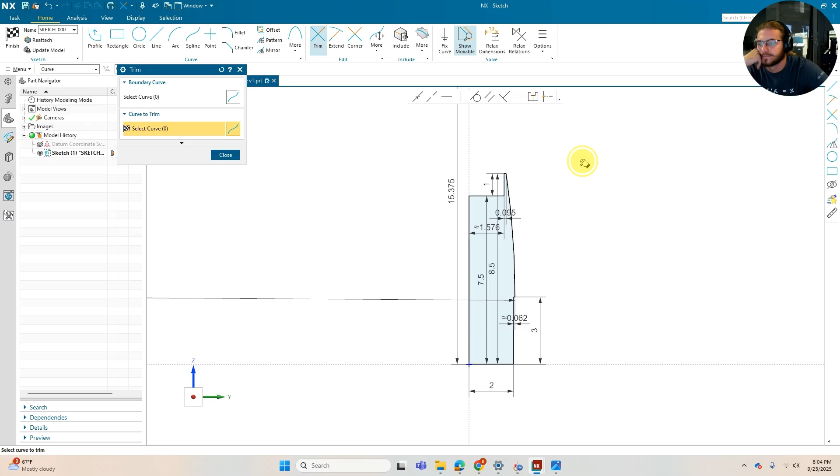So now with that, what we can do is specify that to there, and then finally we're going to use that trim section and just draw away all of that. Oh, and that point up there, we don't need that. So now we have the sketch fully defined once again.

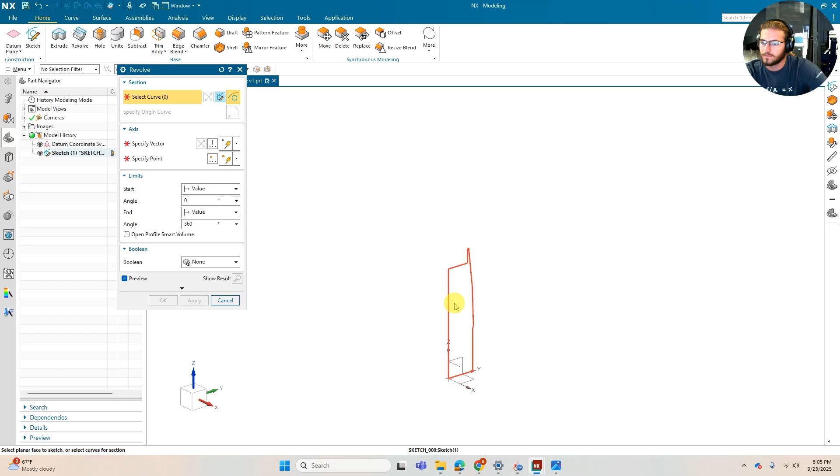We're going to go back to the revolve feature, specify what we want to revolve with the object. There we go. Specify the vector again on the Z, and then specify the point that we want to spin around, which is just the head axis right there.

Now with that, we can hide the sketch, go into the shell feature. We want to specify the top and the bottom for 0.2. And then with that, we have the lower section and the upper section finished. And what we'll do is we will save just like we did before as STL.

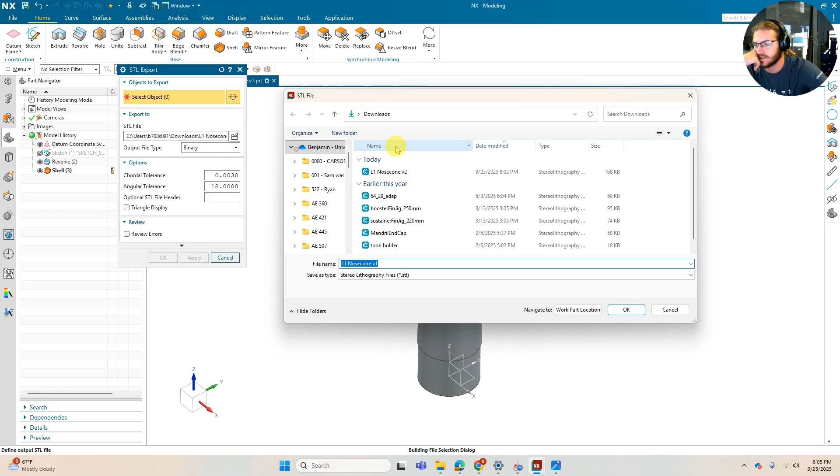So it specifies in the locations, bingo, and then the object we want to specify as this. I was okay with that, and then looking over, and there we go. Now we have the fins CADed and exported to DXF, as well as the STL files exported to STL.

So with that, we'll give those to the actual RSO, and they will get it queued up, and that will be everything that you need to make for your components. Now, if you want to, I'll go into depth with that as well, up to you, but we'll make the coupler, bulkhead, and center rings.

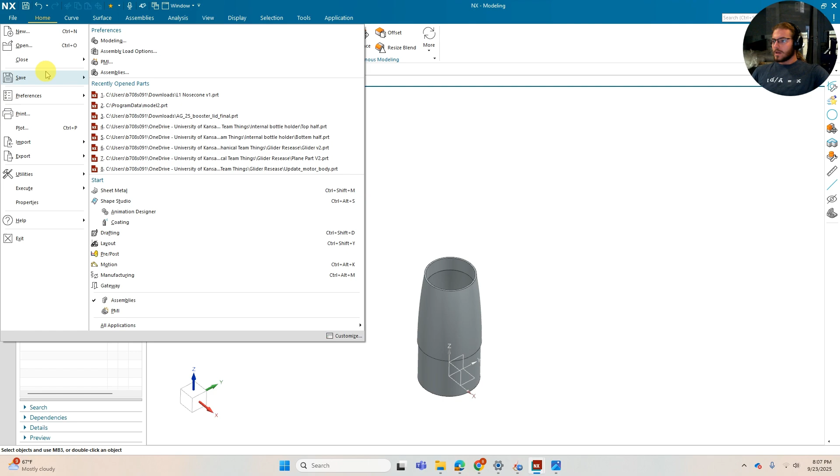It'll be the exact same process as we just went through with the two wooden components, the bulkhead and the center rings being for the wood, so we'll export as DXF. But we do not need to do that for the certification process. The RSO board, the RSO officers, the execs, and all that, we have predetermined measurements for all of that.

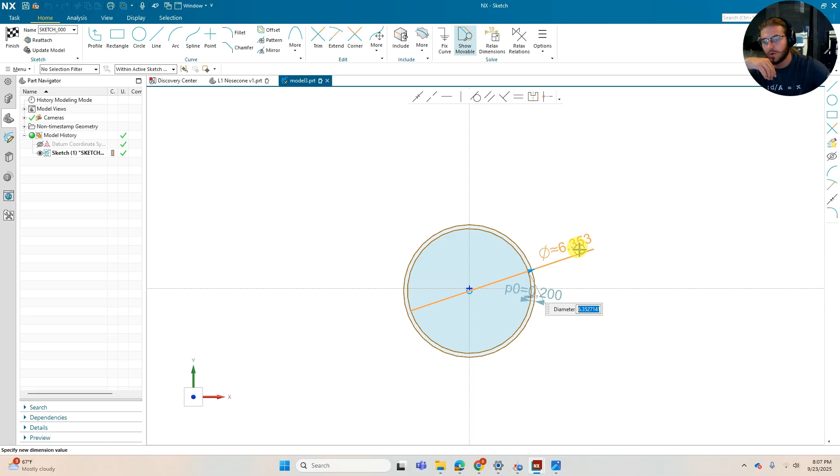But I'll be making a circle for a coupler for this to show you guys how to. So we have a base circle here, then we do an offset of 0.2 of an inch, and then this diameter, whoa, we do not want that. We want it to be 3.6, and that gives a total dimension of the exterior. Oh, we do not have that fully in the middle.

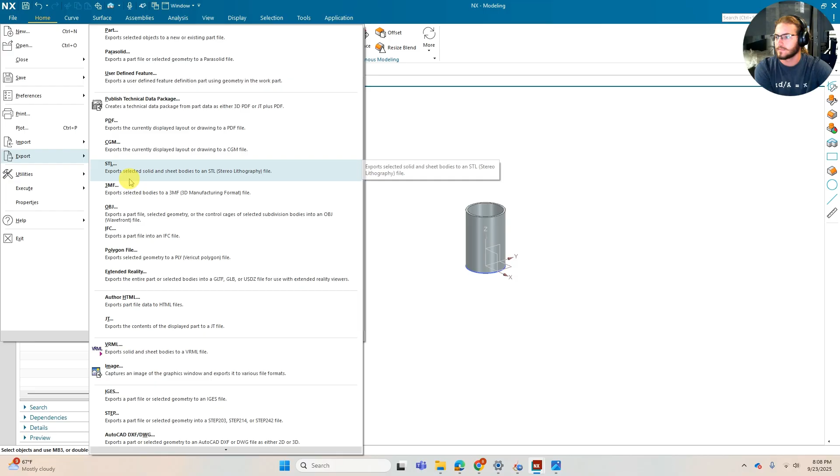Right. Connect, bingo. Now fully sketched, and it's in the dimensions that we need. So now we're just going to extrude this by 6 inches. Done. And then I'm going to export this as a STL. Bingo. I'm going to change the name of it to be L1 coupler.

So one other thing to do is, if you want to have a full CAD model of that, it is not necessary to do that. I would recommend it just to get better with CAD. But that's all you need to make is the nose cone and the fins.

Now, for the next video for manufacturing, I'll show a few videos of these being 3D printed or laser cut, but for the manufacturing process individually, you'll give the file to the exec board or officer board, and they will get it laser cut and 3D printed, and then you'll get the materials back when you come into the next build day or whenever it is done out of the queue,

and then you start manufacturing. So the only step that won't be referred to directly in this video is directly giving the file to the RSO. So the next step for you guys would be getting RSO approval, and that will be with them overlooking the OpenRocket to make sure everything's up to date, it's functional, it will work in flight, and then showing them these part files and making sure that all those are okay. And then when they give you a thumbs up, you can start manufacturing.